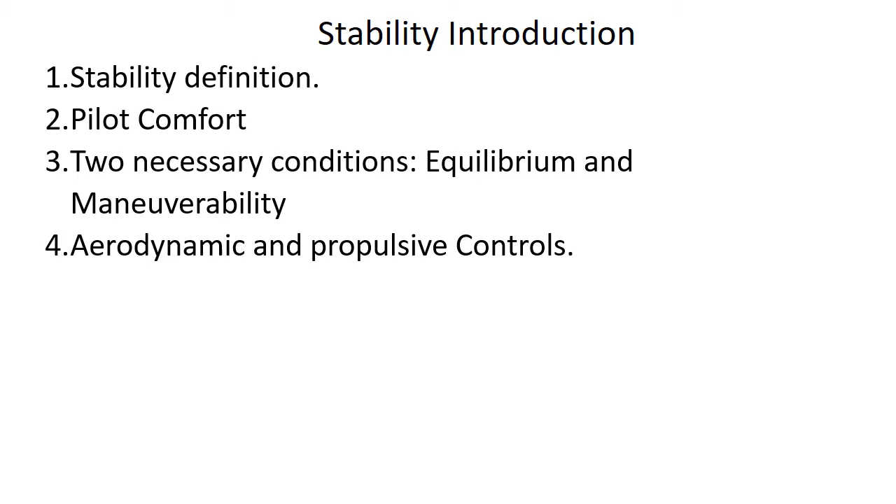To achieve equilibrium or perform maneuvers, the airplane must be equipped with aerodynamic and propulsive controls. The design and performance of such control systems is an integral part of airplane stability and control.

The stability and control characteristics of an airplane are referred to as the vehicle's handling, or flying qualities. So it's called handling or flying qualities.

An airplane will be considered of poor design if it is difficult to handle, regardless of how outstanding the airplane's performance might be. So please differentiate between performance and flying qualities.

Therefore, in the study of airplane stability and control, we are interested in what makes an airplane stable, how to design the control systems, and what conditions are necessary for good handling.

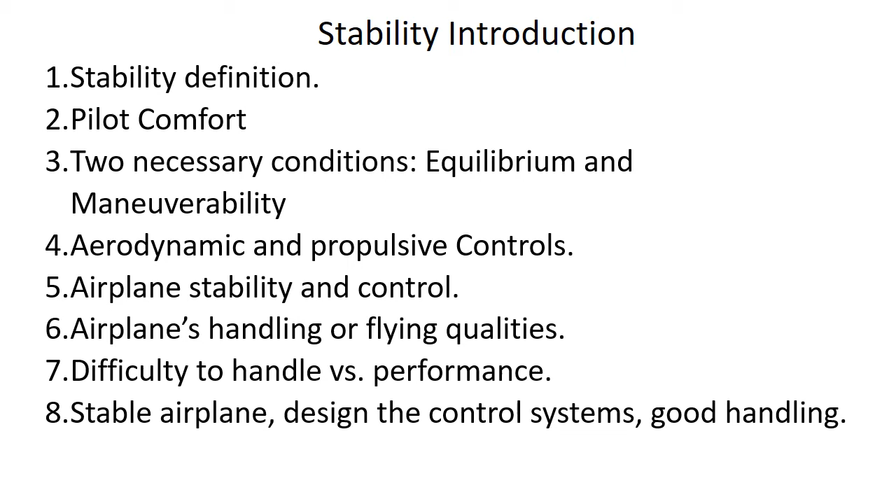We have to know that stability is a property of an equilibrium state. So, to discuss stability, we must first define what is meant by equilibrium.

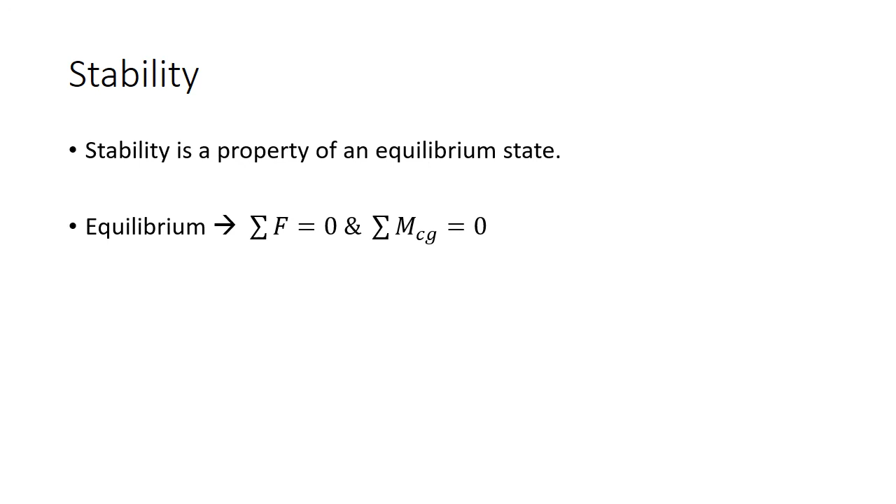The airplane is said to be in an equilibrium state when the resultant force and the resultant moment about the center of gravity both be equal to zero. When forces and moments are not zero, the airplane will be subjected to translational or rotational accelerations.

The subject of airplane stability is generally divided into static and dynamic stability.

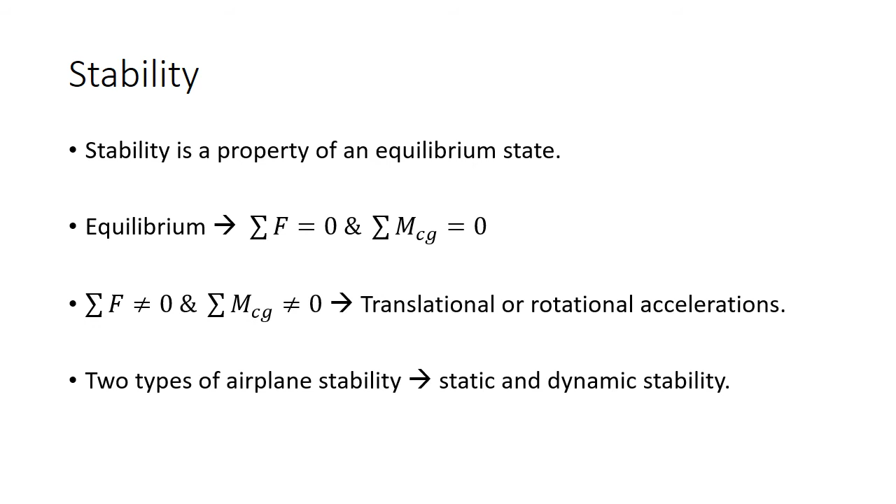Static stability is the initial tendency of the vehicle to return to its equilibrium state after a disturbance. Please take care of the word initial. It is the initial tendency to return the vehicle to its equilibrium position, no matter whether it succeeded or not, to rest again at this equilibrium state.

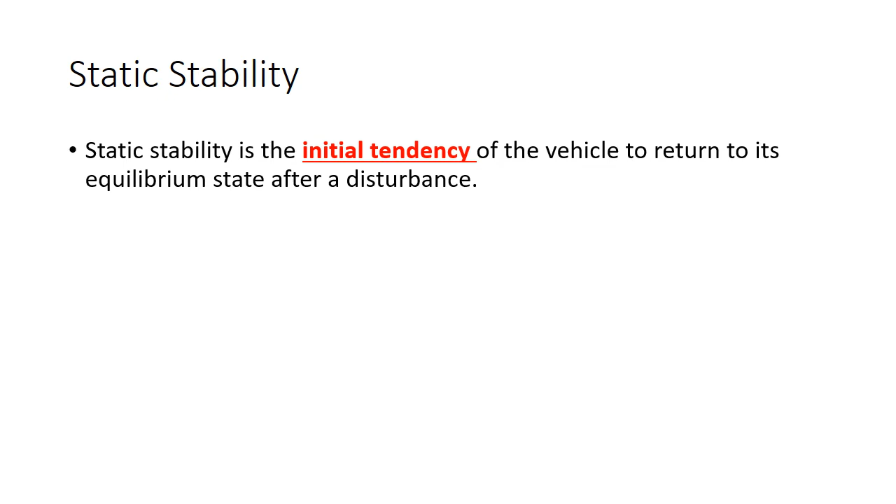So, if the airplane is disturbed, the question is, what is the immediate response after disturbance? Will it start to go back in the direction of equilibrium? If the answer is yes, then the airplane is statically stable.

Let's imagine a ball at rest on a curved surface, like that one in figure A. If the ball is subjected to any disturbance, the gravitational attraction will pull it towards its initial equilibrium position. We call this equilibrium a stable equilibrium point.

While in figure B, if we were able to balance the ball on a curved surface, then any displacement from that equilibrium point will cause the ball to roll off the surface. This equilibrium point is unstable.

That's why we stated previously that stability is just a property of an equilibrium state.

Let's look at figure C. As we can see, the ball is placed on a flat plate. If the ball were to be displaced from its original equilibrium position, it would remain at the new position. This would be classified as a neutrally stable equilibrium point. This is the boundary between stability and instability.

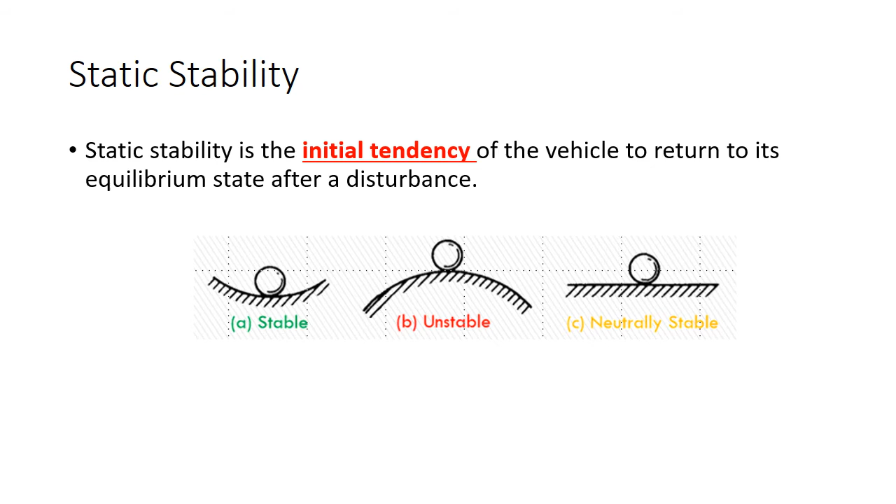While in static stability we were talking about the initial tendency of the airplane to return back to its original equilibrium point after being disturbed, in the study of dynamic stability we are concerned with the time history of the motion of the vehicle after it is disturbed from its equilibrium point.

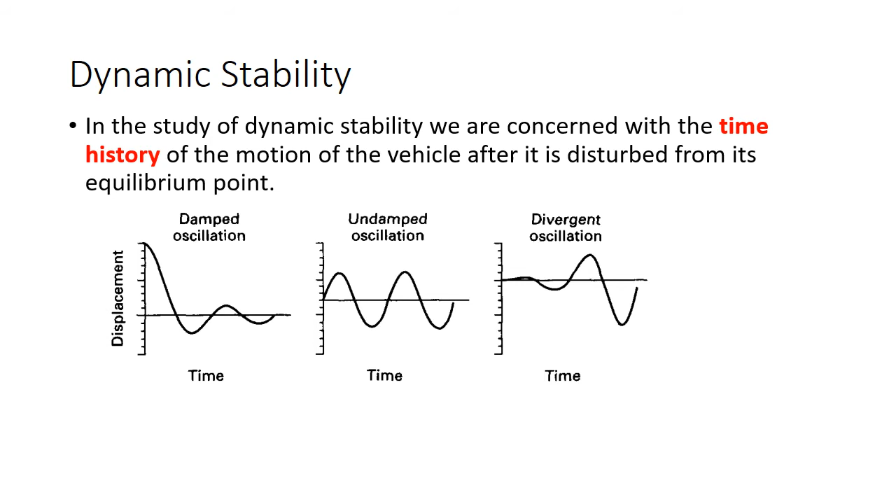By studying these graphs, please note that these scenarios are all statically stable as they have the initial tendency to move to the equilibrium point. But as we can see, we have several airplane motions that could occur if the airplane were disturbed from its initial condition.

As to the figure on the left, the reduction of the disturbance with time indicates that there is a resistance to the motion, and therefore energy is being dissipated. The dissipation of energy is called positive damping. This is the case of dynamic stability.

This is the case of dynamic stability. Positive damping for an airplane is provided by forces and moments that arise due to the airplane's motion. In positive damping, these forces and moments will oppose the motion of the airplane and cause the disturbance to damp out with time, as we can see in the left figure.

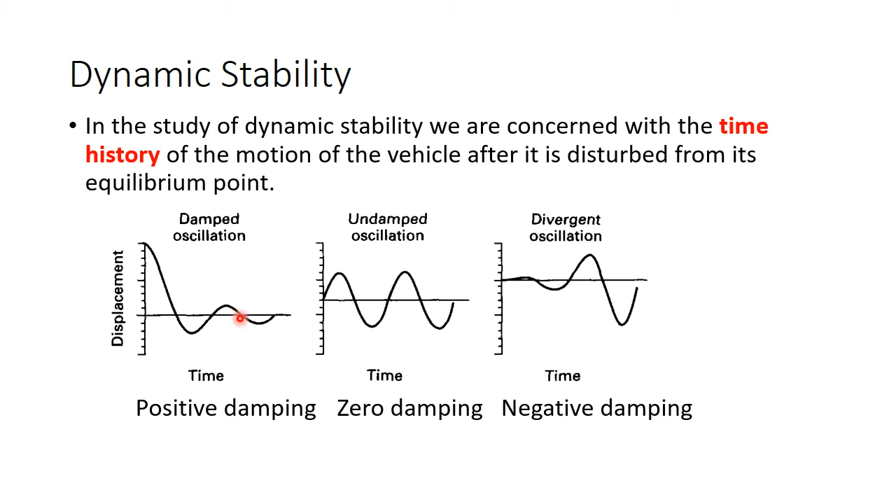As to the right figure, if energy is being added to the system, then we have negative damping. An airplane that has negative damping will be dynamically unstable. So this is the case of dynamic instability. The middle figure shows zero damping, and hence this is the border between dynamic stability and dynamic instability.

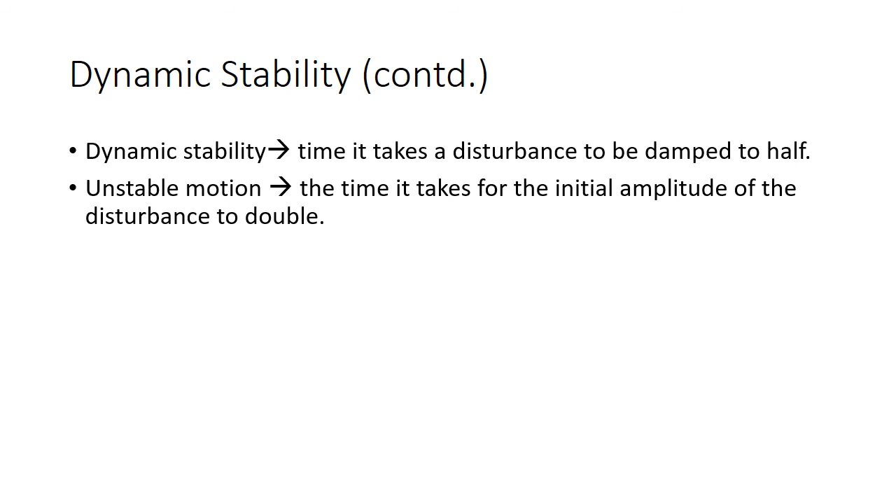Dynamic stability is usually specified by the time it takes a disturbance to be damped to half of its initial amplitude. In the case of an unstable motion, it is specified by the time it takes for the initial amplitude of the disturbance to double. In the case of an oscillatory motion, the frequency and period of the motion are extremely important.

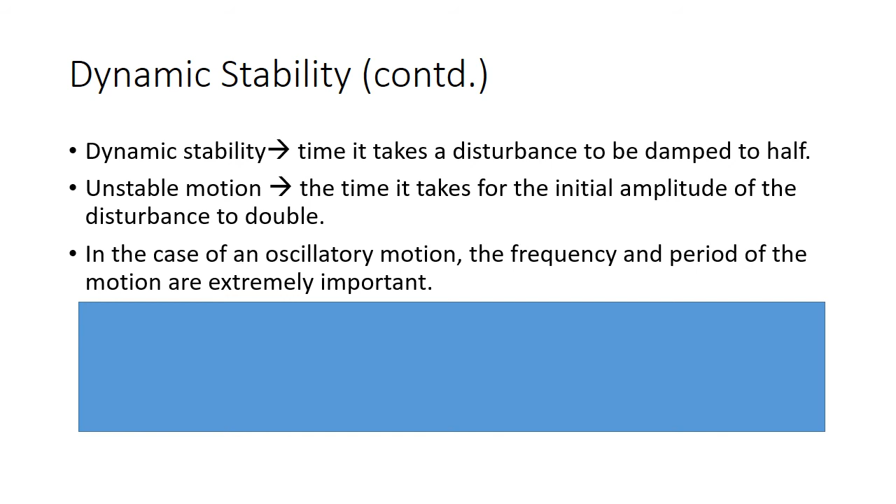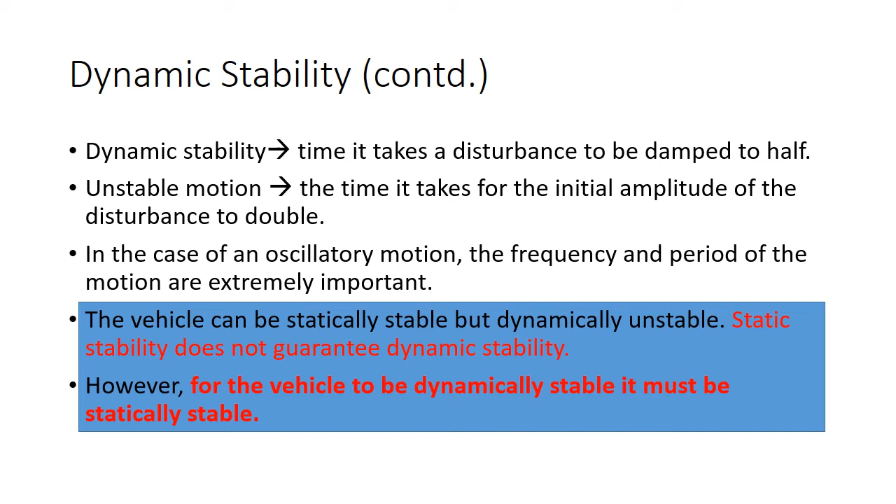To conclude the issue of stability, please note that the vehicle can be statically stable but dynamically unstable. Static stability, therefore, doesn't guarantee dynamic stability. However, for the vehicle to be dynamically stable, it must be statically stable.

The condition of static stability for an airplane is the same, like the previous example of the ball swinging on a curved surface. Again, we have to have a restoring moment when the airplane is disturbed from its equilibrium position.

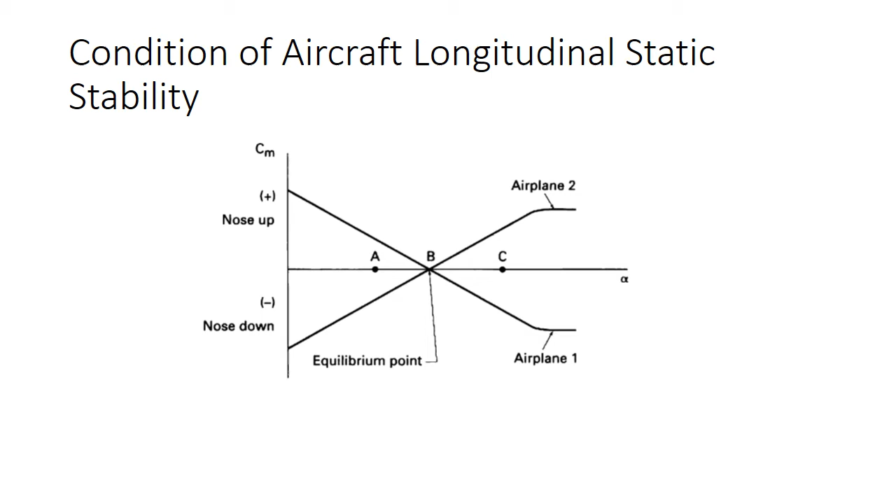On the basis of this analysis, we can conclude that to have static longitudinal stability, the aircraft pitching moment curve must have a negative slope through the equilibrium point. Therefore, Cm alpha, which is dCm by d alpha, should be less than 0.

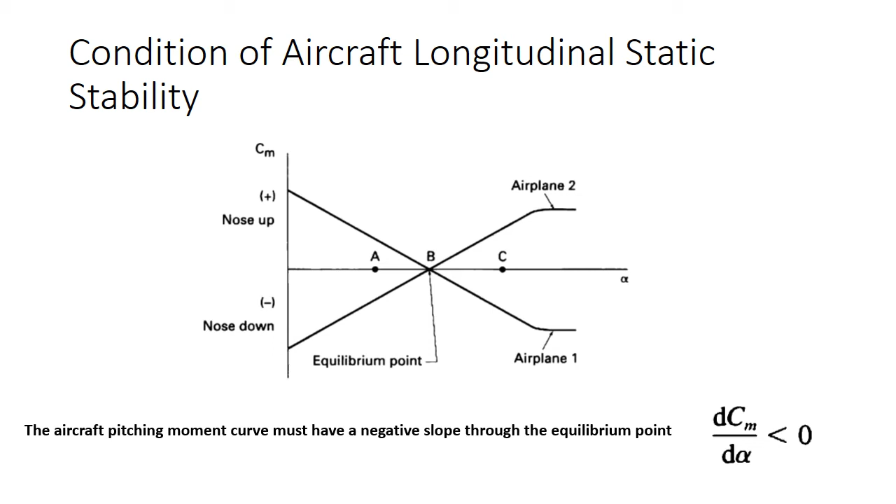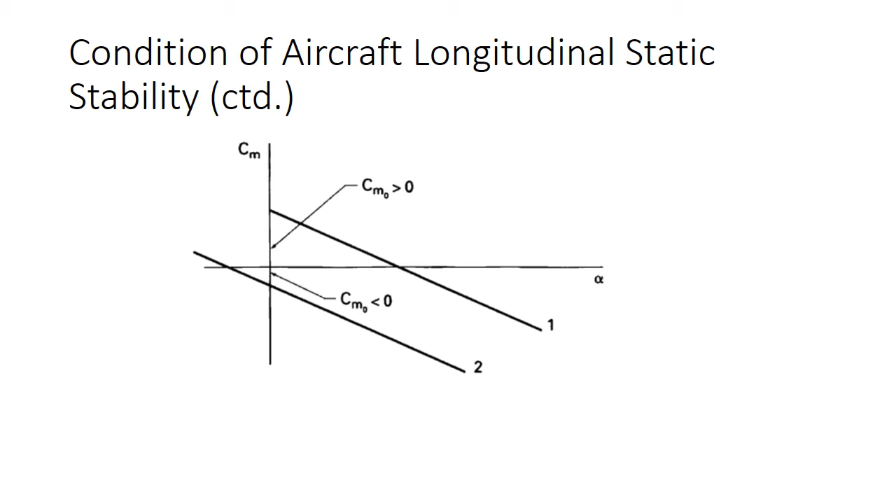If we look at the pitching moment curves of two airplanes that satisfy the previous condition of static stability, we can notice that both curves have negative slopes. So Cm alpha, which is equal to dCm by d alpha, is less than 0.

But what about the trim condition? As we know, trim, which is the state of equilibrium, means that the airplane is not subjected to any moment. This happens when Cm equals 0. As we can see, airplane 1 can be trimmed at a positive angle of attack, while airplane 2 can be trimmed only at a negative angle of attack.

Now, the question is how the airplane can generate enough lift to carry its weight with a negative angle of attack. So, airplane 2 can't generate such lift at its equilibrium point, while airplane 1 can.

Therefore, in addition to static stability, we must have a positive intercept, that is Cm naught greater than 0, to trim at a positive angle of attack. If you have a negative intercept in the pitching moment curve, you can't satisfy such condition.

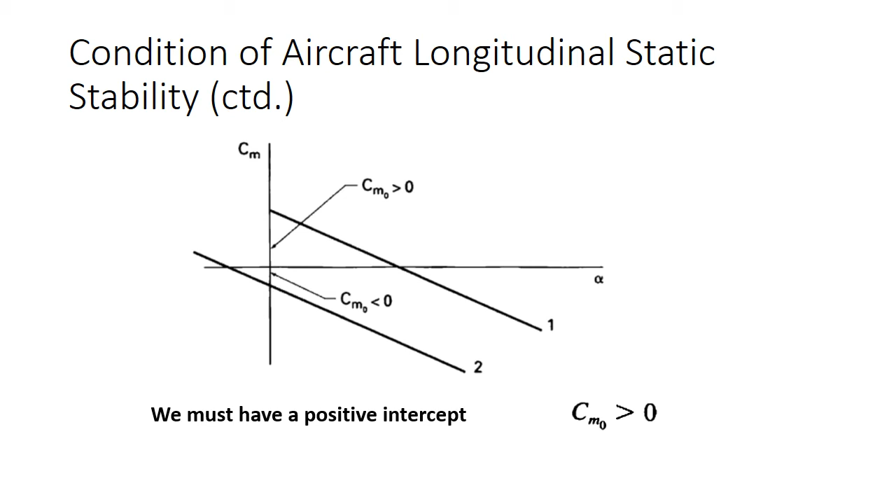The two conditions of airplane longitudinal static stability are: first, the airplane should have a negative slope of the Cm versus alpha curve in order to restore the airplane to its equilibrium point if subjected to any external disturbance. Second, the pitching moment versus alpha curve should have a positive intercept, meaning Cm naught should be greater than 0. This is to enable the airplane to trim at a positive angle of attack, allowing the aircraft to generate enough lift to carry its weight.

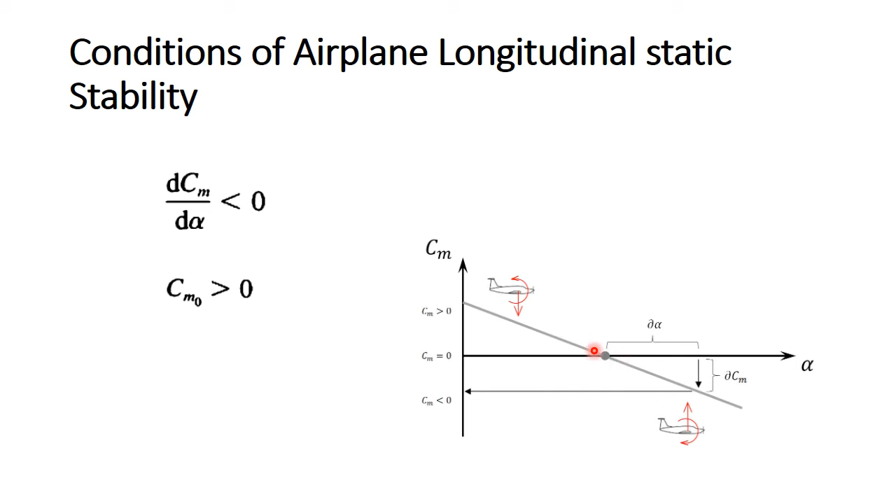If we have pitching moment versus coefficient of lift curve instead of pitching moment versus alpha, the criterion of longitudinal static stability can be reached as follows.

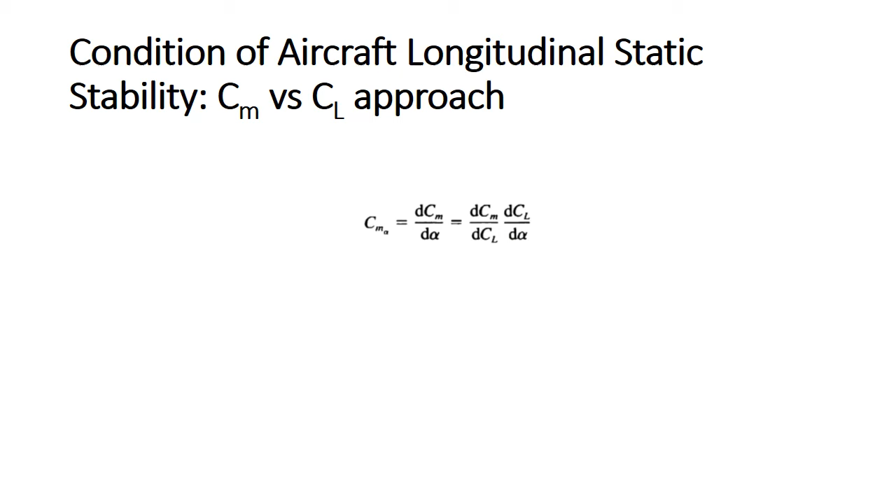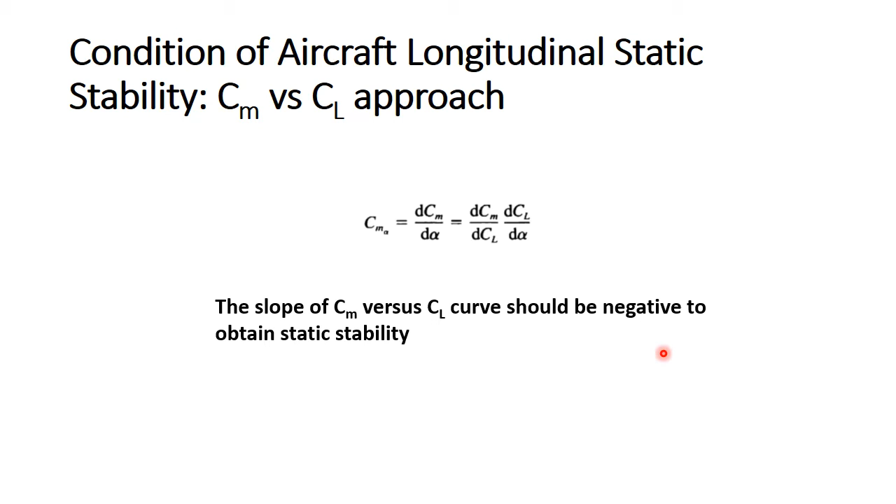By definition, Cm alpha is dCm by d alpha. It can be expanded to dCm by dCl times dCl by d alpha. But look at this term: dCl by d alpha is the slope of the coefficient of lift versus alpha curve, and this term is always a positive quantity. So, in order to have a negative Cm alpha, we have to have a negative dCm by dCl. So the slope of Cm versus Cl curve should be negative to obtain longitudinal static stability.

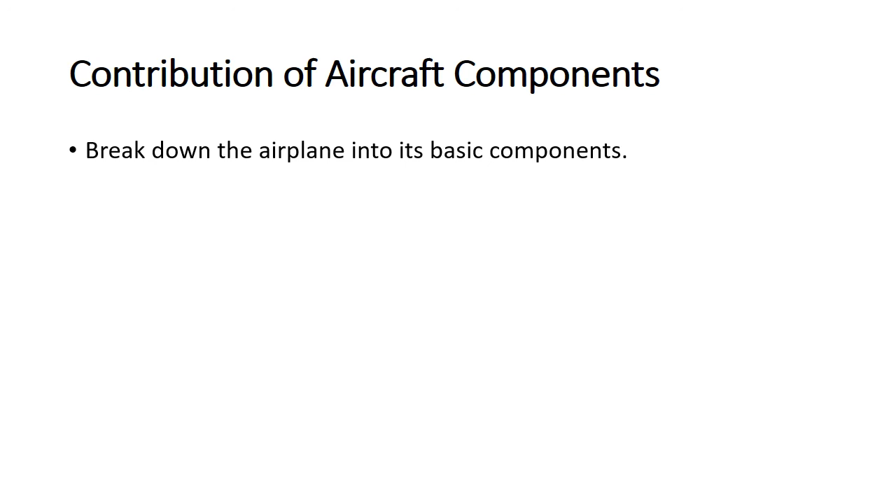To know the contribution of aircraft components to the pitching moment and hence the static stability of the airplane, we will start to break down the airplane into its basic components. We shall develop simple methods for computing the aerodynamic stability and control coefficients. These methods, in general, are accurate for preliminary design purposes and show the relationship between the stability coefficients and the geometric and aerodynamic characteristics of the airplane. Moreover, the presented methods are valid only for the subsonic flight regime.

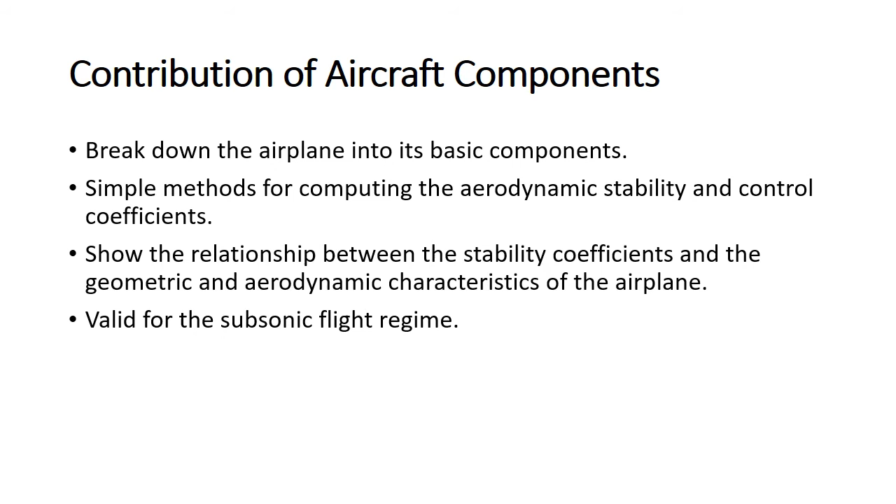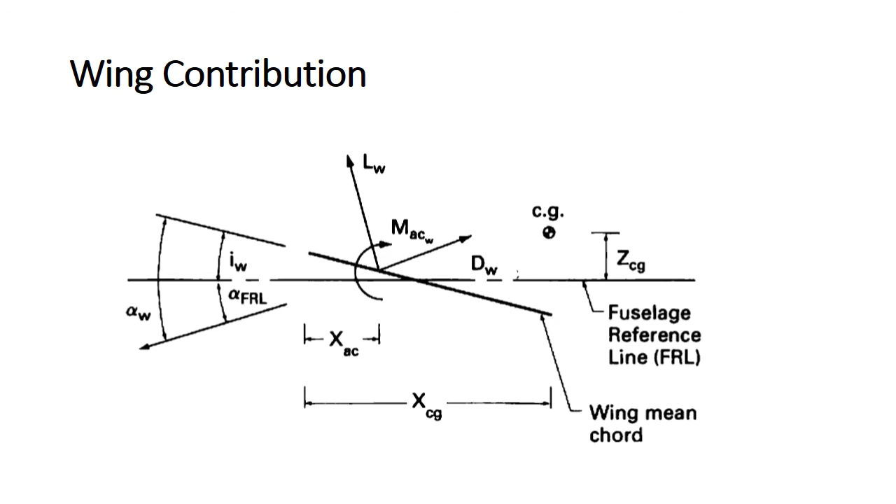Since the whole airplane is considered as a rigid body in this analysis, it is convenient to take moment about the CG of the airplane. If we sum up the moments coming from the vertical and horizontal components of the lift and drag forces, and the pitching moment of the wing, about the center of gravity of the whole airplane.

First, the moment of the vertical component of the lift. This is the lift force times cosine the angle between the lift and the vertical, which is the same angle between the fuselage reference line and the free stream velocity, denoted as alpha FRL, which from geometry equals alpha wing minus the incidence angle of the wing, IW. Times the arm of the force, which is the distance between the aerodynamic center of the wing and the CG of the airplane, XCG minus XAC. Note that the reference point of all horizontal distances is the leading edge of the wing.

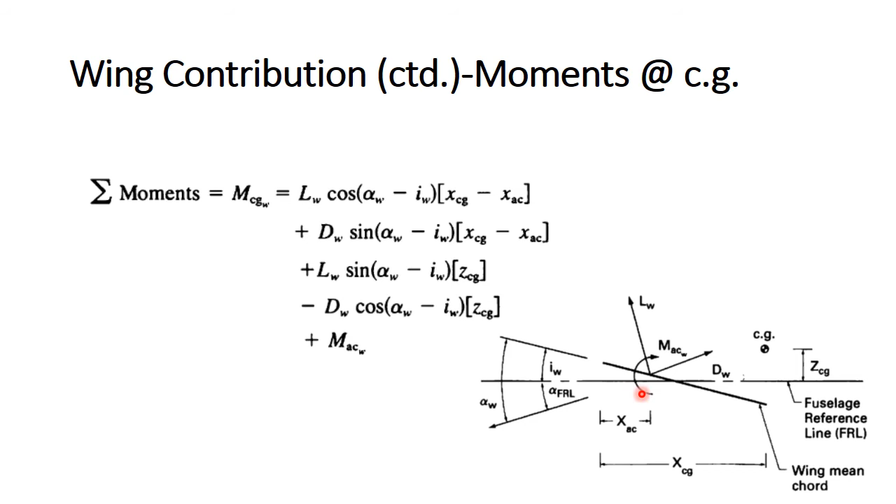Usually, we are not interested in moments as they may vary from one airplane to another. We are interested in the coefficient of moment, which can be obtained by dividing moment by half rho v squared S C bar. Take care that the reference dynamic pressure of the whole airplane is the dynamic pressure of the wing. Also, the characteristic length of the longitudinal analysis of the airplane is the mean chord of the wing, C bar. So, when dividing MCG wing by this quantity, we get the coefficient of moment, CMCG wing.

When dividing the first term by the same quantity, the wing lift coefficient will appear. XCG and XAC both will be divided by C bar. Similarly, the second term will result in wing drag coefficient. The third and fourth terms can be obtained similarly.

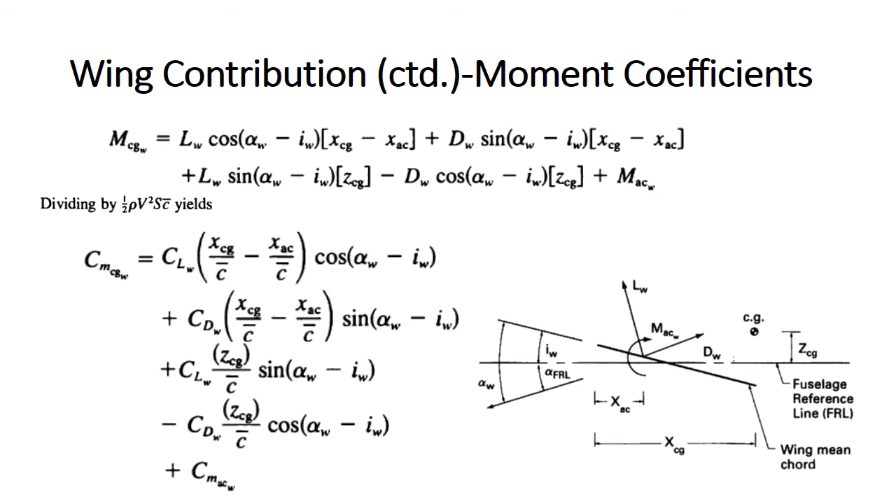Since we are in a preliminary stage, we are not interested in a very accurate analysis. This is because we have dozens of alternatives and choices to design our airplane. So, the equation of moment coefficient can be simplified by assuming that the angle of attack is small.

And hence, the following assumptions are valid. Cosine of small angles is equal to 1. Sine of small angles is equal to the angles themselves in radians. Moreover, usually CL is much greater than CD.

So, in this equation, the second term could be neglected with respect to the first term. The third and fourth terms, which represent the horizontal components of the forces, can also be neglected due to their small moment arm ZCG.

Hence, the wing contribution to the pitching moment coefficient can be reduced to these two terms only. So, the contribution of the wing to the whole pitching moment of the aircraft is only by the lift force and the pitching moment of the wing about its aerodynamic center.

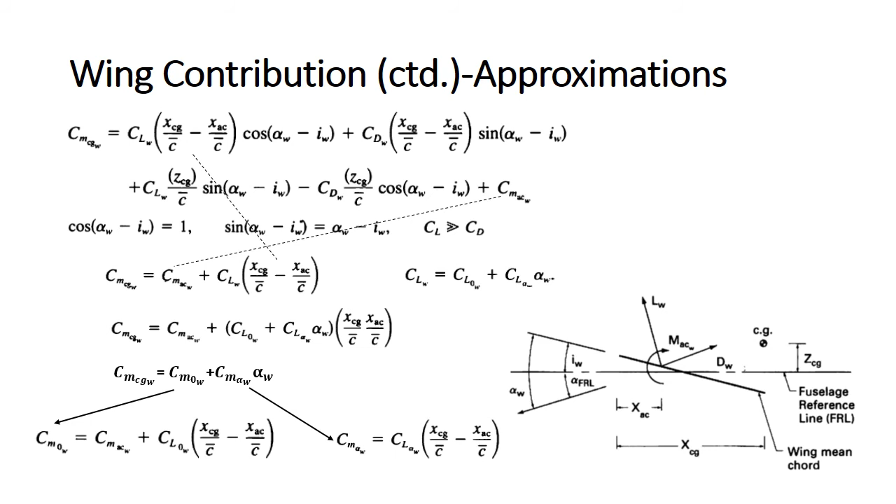We can find that Cm0 wing equals Cm AC wing plus CL naught wing times this term, and CM alpha wing is equal to CL alpha wing times the same term.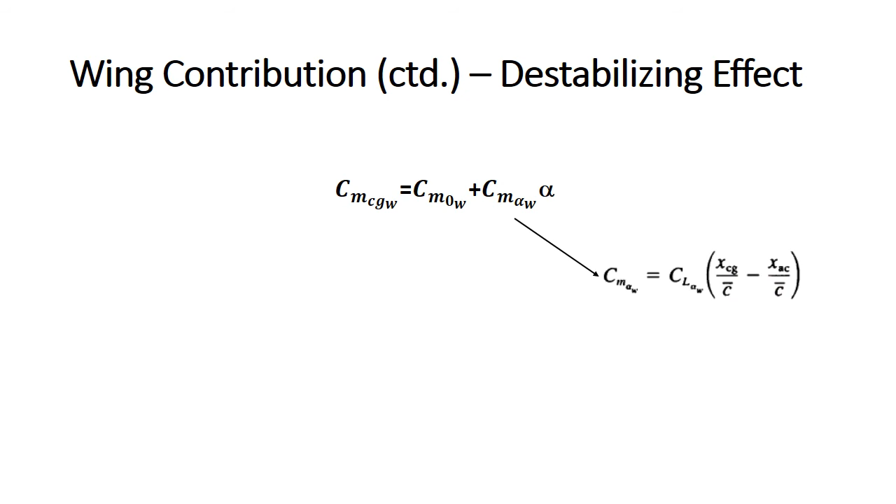The contribution of the wing to Cm alpha of the whole airplane will be by this term. It is obvious that CL alpha wing is usually positive, and the CG of most conventional airplanes lies behind the aerodynamic center of the wing. Hence, this bracket is also positive. So Cm alpha will be positive.

Let's recall the condition of longitudinal static stability of the aircraft. Cm alpha should be less than 0. So this term is destabilizing the airplane.

On the other hand, the constant term Cm0 wing equals CMAC wing, which is usually negative and usually greater in magnitude than the second term. Finally, Cm0 wing is a negative quantity.

Let's recall the second condition of longitudinal static stability of the airplane. Cm naught should be positive, should be greater than 0. So this term is destabilizing the airplane too. Therefore, the wing contribution to longitudinal static stability is destabilizing for most conventional airplanes.

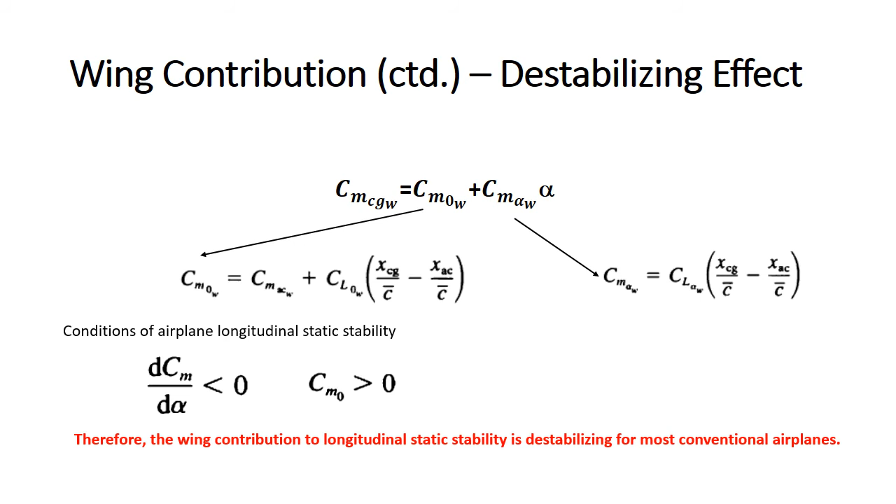From an aerodynamic point of view, the tail is like the wing, as it is a wing-like shaped 3D surface. However, the main function of the tail is to sustain stability. That's why we call it a tail, like birds. The wing is usually cambered to generate lift, however, the tail is usually symmetric.

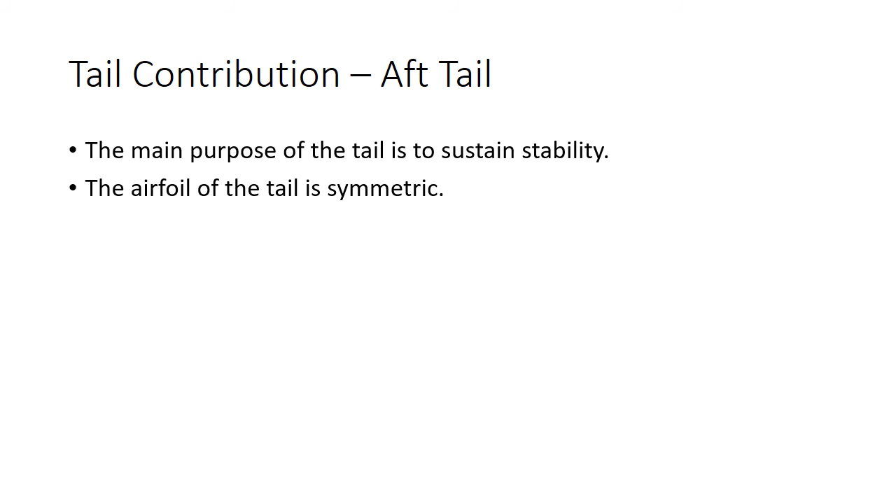Since the cross-section of the tail is usually symmetric, the center of pressure lies on the aerodynamic center at the quarter chord, and hence no pitching moment about the aerodynamic center will be generated by the tail lift force. So the coefficient of moment about the aerodynamic center of the tail is equal to 0.

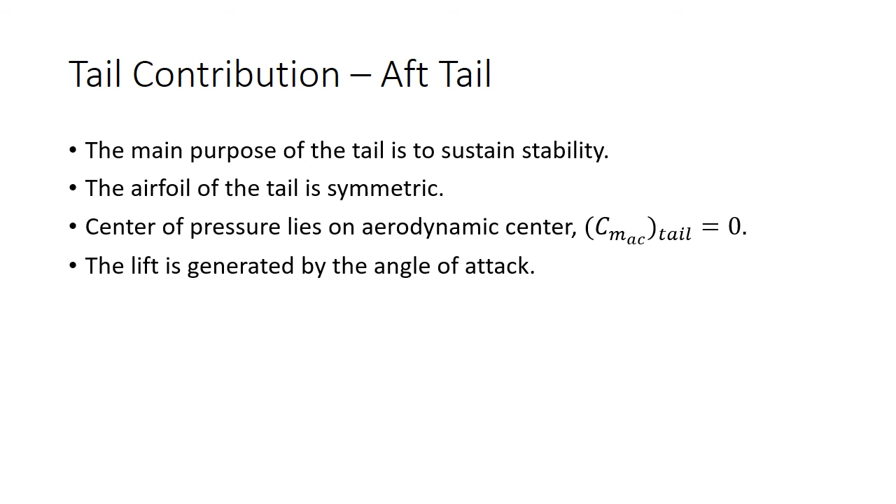Also, because of symmetry of tail sections, the lift is usually generated by the angle of attack. Moreover, the velocity at the tail is different from that of the wing, as it is subjected to downwash coming from the trailing vortices generated at the tip of the wing. The angle between the free stream velocity vector and the deviated velocity vector at the tail is the downwash angle epsilon.

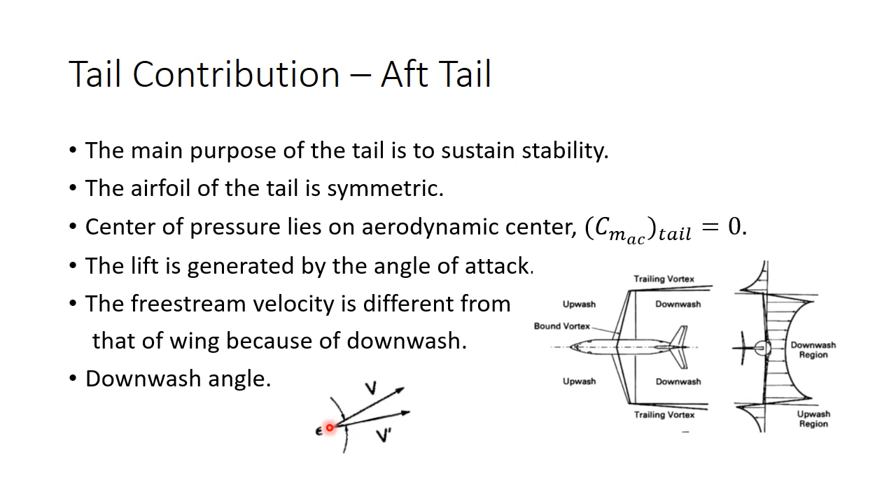In this analysis, the tail surface will be replaced by its mean aerodynamic chord. The tail is mounted at an incidence angle IT. The free stream velocity vector is shifted by the downwash angle epsilon. The lift and drag forces are assumed to be vertical and horizontal because of the agreed small angles approximation.

The aerodynamic center of the tail is located LT distance from the CG of the airplane. This distance will be the arm of the moment generated by the tail lift. The aerodynamic center of the tail is also located Z distance from the CG of the airplane. This distance is very small compared to LT, the tail moment arm.

Hence, the horizontal component of the forces will be neglected with respect to the vertical component of the forces because they have a very small arm compared to this very long arm.

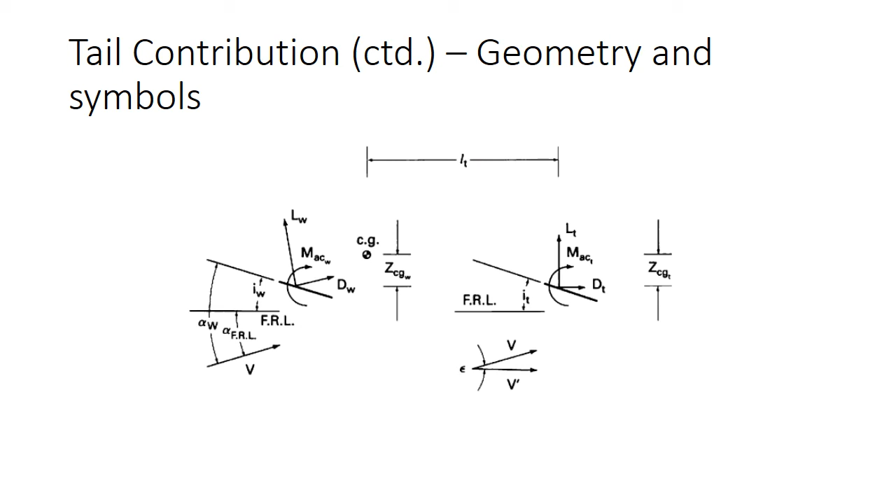The pitching moment due to the tail can be obtained by summing the moments about the center of gravity. The contribution of drag will be neglected compared to the contribution of the lift. This is because the coefficient of lift is much bigger than the coefficient of drag.

The horizontal components of lift and drag will also be neglected as their moment arm ZCG is much less than the moment arm of the vertical components of the forces, LT. Look here: this is LT, the moment arm of the horizontal tail, and this is the arm of the vertical component, and this is the small arm of the horizontal component. So you will neglect the horizontal force contributions to the moment compared to the vertical contribution.

The pitching moment of the tail about the aerodynamic center is zero, since the tail airfoil is usually symmetric. So only the first term will remain in this equation, which contains the lift force of the tail, capital LT, times the moment arm, small lt, and the cosine function will be approximated to 1 due to small angle approximation.

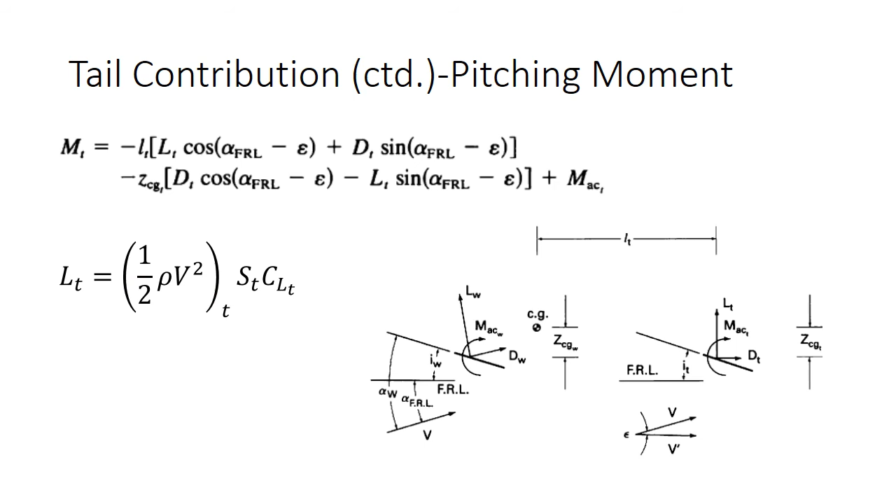we get the contribution of the tail in the pitching moment about the CG to be minus horizontal tail moment arm, small lt, times coefficient of lift of the tail, times the dynamic pressure of the tail times the tail area, St. Note that the minus sign is due to the pitching down moment resulted from the tail lift force about the CG of the airplane.

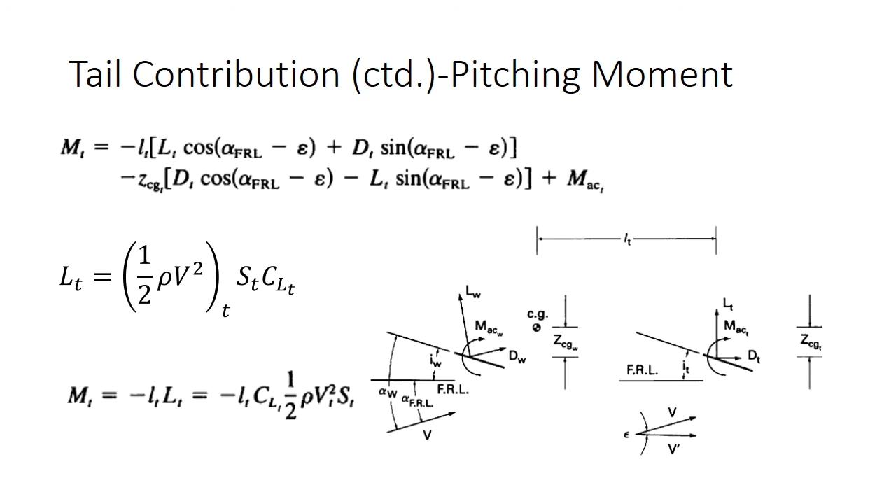We are not interested in moments as they may vary from small to huge airplanes, so we will divide by half rho v squared, which is the dynamic pressure of the wing, times S, the area of the wing, times c bar, the characteristic length of the airplane, which is the mean aerodynamic chord. Note that the reference dynamic pressure is the dynamic pressure of the wing, and the reference length in longitudinal analysis is the mean aerodynamic chord of the wing, c bar.

Let's define a new dimensionless quantity, the ratio between the dynamic pressure of the tail and that of the wing. We will call it tail efficiency, eta. The magnitude of eta depends on the location of the tail. If the tail is located in the wake region of the wing, eta will be less than unity. If the tail is located in the slipstream of the propeller or in the exhaust wake of the jet engine, it will be greater than unity. In general, it can have values in the range between 0.8 to 1.2.

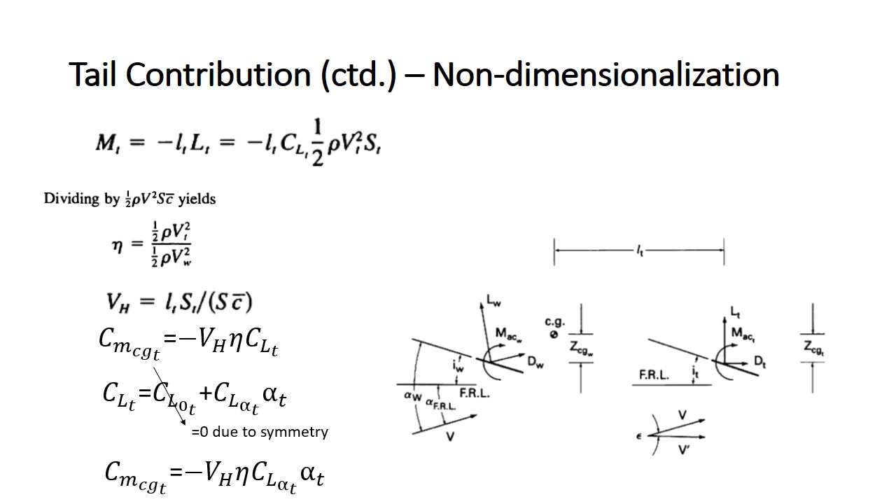Finally, we get this expression, which includes alpha tail, which should be correlated to alpha wing later on. As discussed before, the downwash angle epsilon is the angle between the free stream wind and the deviated wind Vt that will reach the tail.

Let's define the angle x to be between the fuselage reference line FRL and the direction of Vt. Both of these angles are equal because they are alternate interior angles. From a geometry point of view, the angle of attack of the tail, alpha t, is equal to the incidence angle of the tail plus this angle x. And this x angle plus the downwash angle are equal to alpha FRL because they are all also alternate interior angles.

This alpha FRL, from the geometry, is equal to alpha wing minus the incidence angle of the wing, IW. Substituting back with the last two equations into the angle of attack of the tail, alpha t, we get the angle of attack of the tail as a function of alpha wing, the angle of attack of the wing.

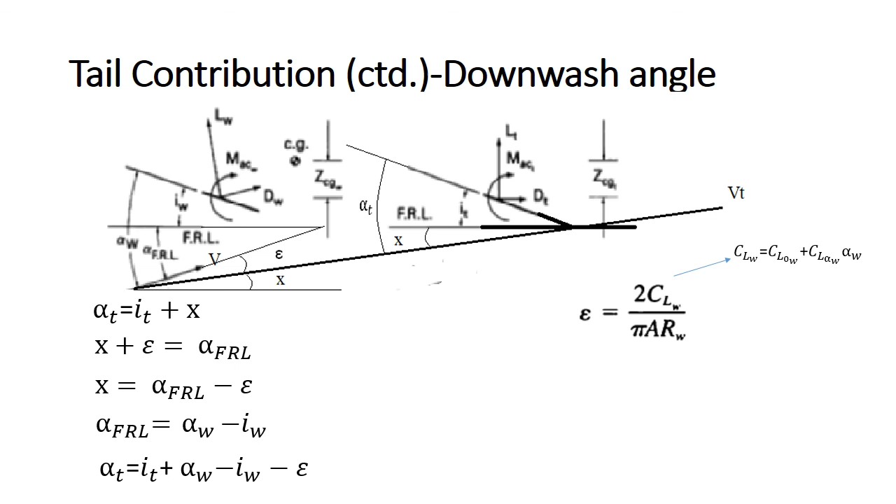Now, what about the downwash angle epsilon and how it is related to the angle of attack alpha w? It can be derived from finite wing theory behind a wing with an elliptic lift distribution to be a function of the lift coefficient of the wing, CL wing, and the aspect ratio of the wing, ARW, as shown in this expression. Since CLW is equal to CL naught W plus CL alpha W times alpha W, the downwash angle could be written in a more convenient linear form as follows.

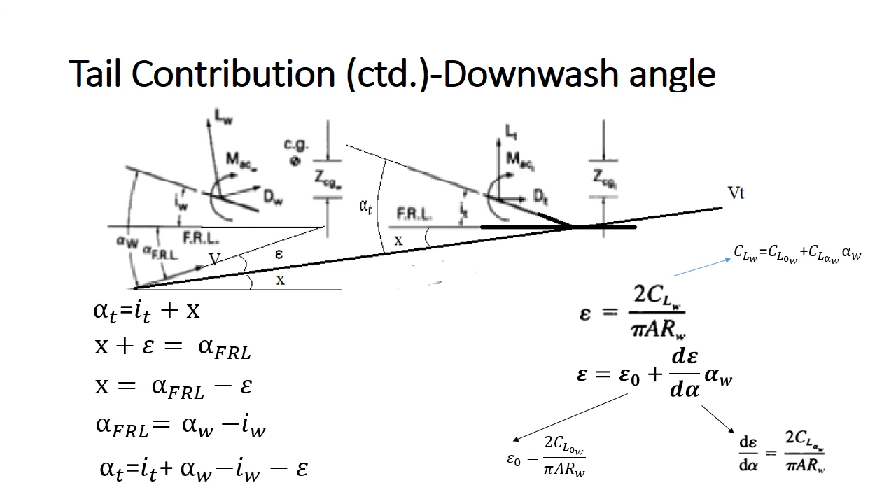The constant part, epsilon naught, will be a function of CL naught W, which is not zero for a cambered wing because we are talking about the coefficient of lift of the wing. The variable part, d epsilon by d alpha, will be a function of CL alpha W, as shown in this expression.

Back to the contribution of the tail to pitching moment about the CG of the airplane. Substituting with alpha tail and the downwash angle as derived previously, then trying to collect the constant term away from the variable term so as to get the contribution in a form of a linear equation, note that alpha in this equation is alpha wing. Whenever we say alpha without a subscript, we mean alpha of the wing. It is the reference alpha for the whole airplane.

We get CM CG naught, the constant term, is equal to eta times VH, which is the volume ratio of the horizontal tail, times the coefficient of lift of the horizontal tail, CL alpha t, times the constant part of alpha t. Take care of sign change due to the minus sign in the original equation.

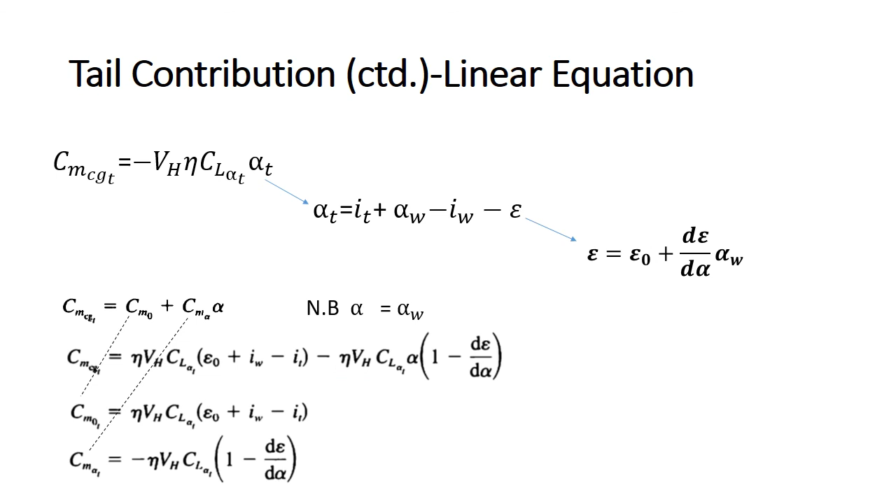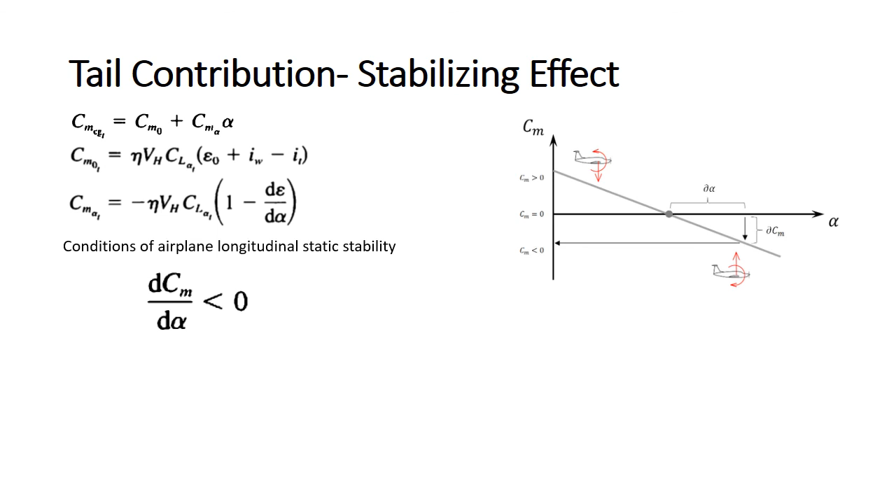Recalling the conditions of longitudinal static stability of the whole airplane, Cm alpha should be negative and Cm naught should be positive. Fortunately, Cm alpha tail is a negative quantity, as d epsilon by d alpha is in the range of 0.4, so this bracket will be positive, and the tail efficiency, the tail volume ratio, and the coefficient of lift of the tail are always positive quantities, so the whole expression will be negative. As to Cm naught, these are positive quantities, and the incidence angle of the wing is usually positive, and the epsilon naught also is usually positive.

So we can adjust the incidence angle of the tail, IT, to make this term positive enough to trim the airplane at a positive angle of attack. Sometimes the tail is mounted at a negative incidence angle to get a desired positive intercept Cm naught. So the tail is used to stabilize the airplane through this negative Cm alpha tail, and it is used also to let the airplane fly at a positive angle of attack to generate lift through the positive Cm naught of the tail.